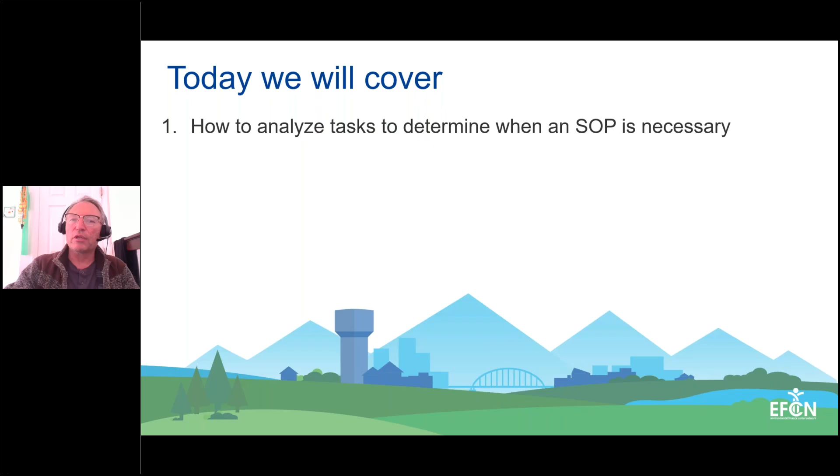We're going to be covering three main points in today's training. First, we're going to briefly talk about how to analyze when an SOP is actually necessary. You don't need an SOP for every task in a water and wastewater system, it's only for those critical tasks that need to be performed the same way each time.

The main bulk of our training today is we're going to be walking through the 9 components of an SOP document, and we're going to be using an actual example from a utility called emergency repair of water main breaks. So we're going to be looking at the conceptual nature of the SOP as a 9-component document, but also looking in the context of an actual example. And lastly, throughout the training, we're going to be talking about tips for creating and testing SOPs.

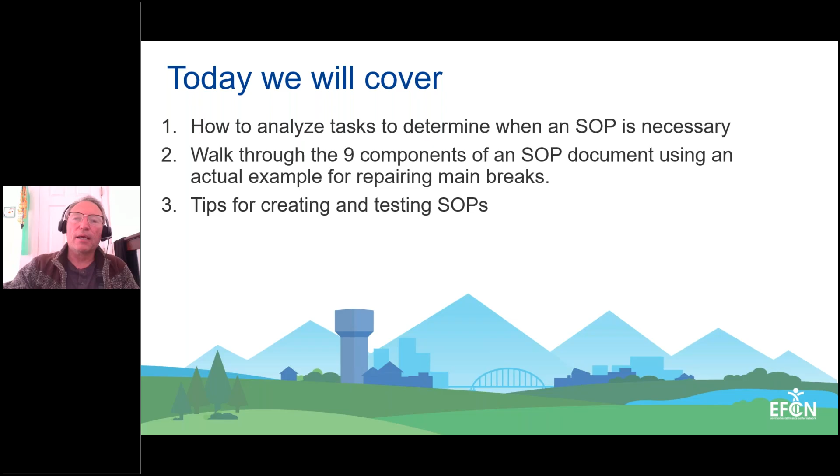You have some resources in the handouts tab. One is 2 sample SOPs, actual SOPs that were developed, and we've redacted the names and identifying information from those SOPs. The second is an editable SOP template that you can use to develop your own SOPs. And lastly, there are some references.

Did we lose the screen, Owen, or are we okay still? Still able to see your slides.

Okay, good. And lastly, there's some reference links that are actually in the PDF of the presentation. I'm going to go off camera for a little bit just to maximize the view of the slides for you on your end as we get going.

So let's jump in here. And first of all, let's just briefly talk about what a standard operating procedure document is.

First of all, it's an official document, and it's going to include step-by-step instructions for completing some type of critical task. And we want to be able to do that task in essentially the same way each time. It may not be in a robotic way where every single action is exactly the same, but it follows a standardized sequence and standardized consideration.

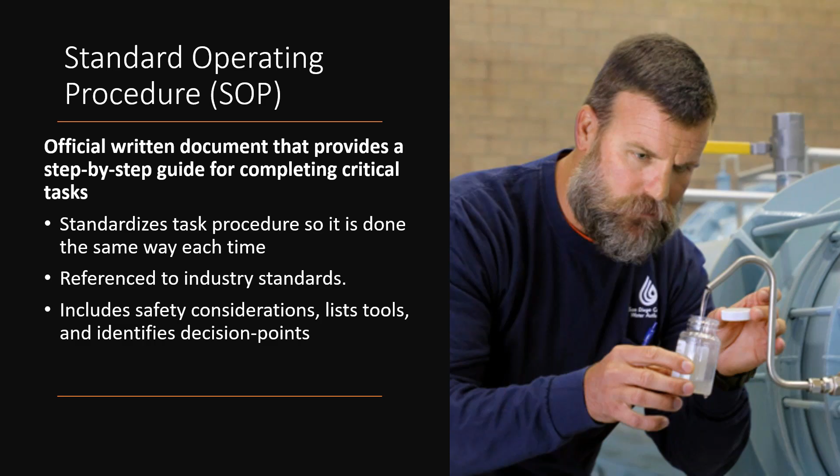And this document provides the answers to the basic 5 question types: the who, what, when, where, how. First of all, the what. In this case, in the example we're looking at today, is emergency water main break repair. And when is when a main break occurs. And where, in this case, it's in the context of a water distribution system.

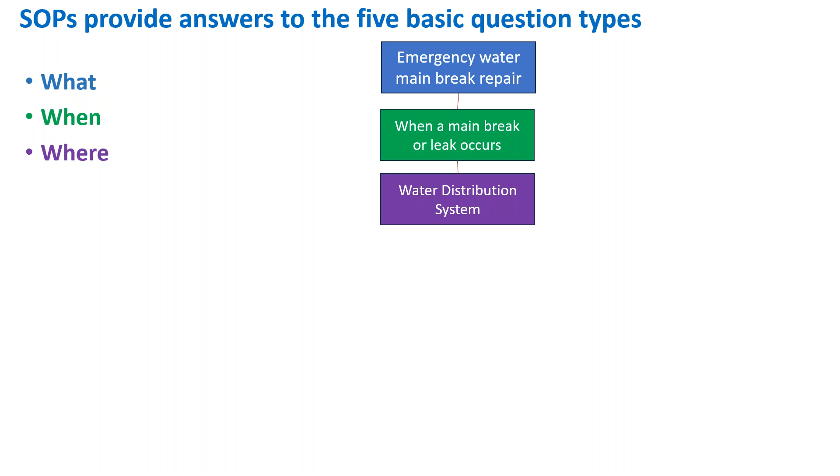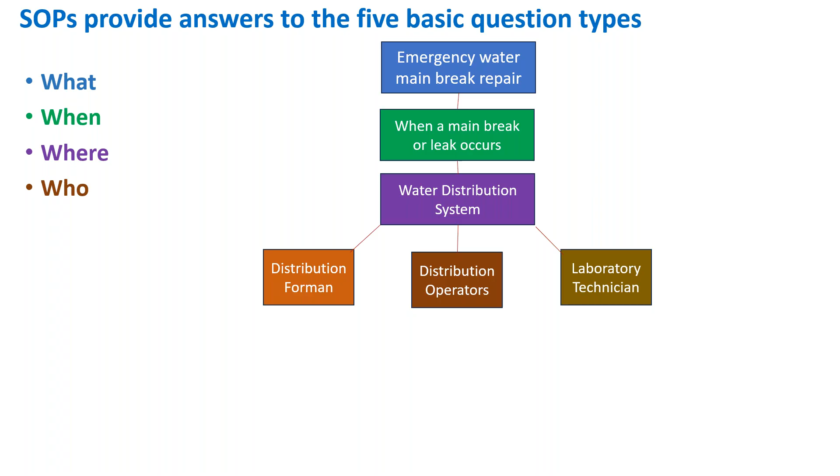Now, the where could be well 1 or east treatment plant, but in this case, the where is anywhere in the distribution system. The who, in the example we're looking at today, includes 3 different employee groups. You have the distribution foreman, the distribution operators, and laboratory technicians that are all involved in this particular task. If you're developing an SOP for a different task, obviously all these questions would be different answers.

And finally, the how tells what and how each of these employee groups is going to function during the SOP task. First of all, the distribution foreman in the example that we're looking at today is going to evaluate the site conditions for safety and the type of water main break, and is responsible for ensuring that there's resources and tools available to complete the task safely and effectively.

The distribution operators are the ones that are going to actually excavate, repair, and disinfect the main, and they're going to collect bacteria samples. And then finally, the laboratory technicians are the ones that are going to run the coliform test and report back to the distribution foreman.

And of course, once the main has been repaired and it's been flushed and disinfected, and the coliform results have been run, and there is a negative, there's no coliform in the system, then they're able to actually put the main back online.

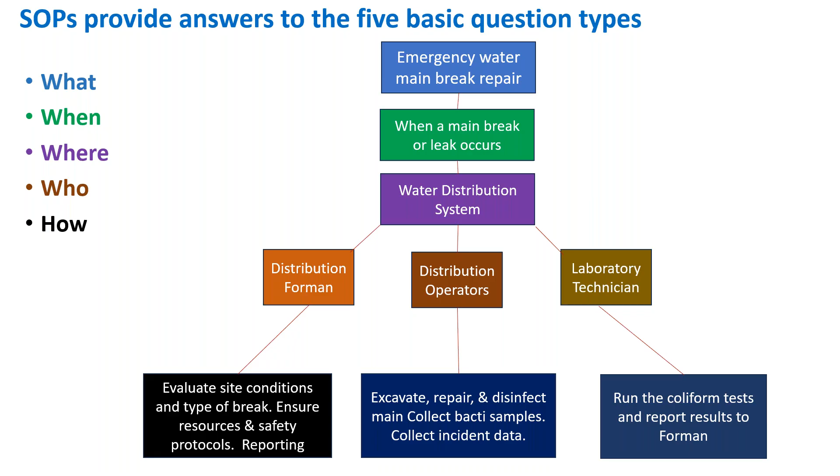There is some consideration about when you actually need an SOP for a task. I mentioned before, you don't want to have an SOP necessarily for every single task. There's some reasons for that. It would become administratively difficult, but it would also be difficult for the operators, because we don't want our operators to be, our operations staff is not robots.

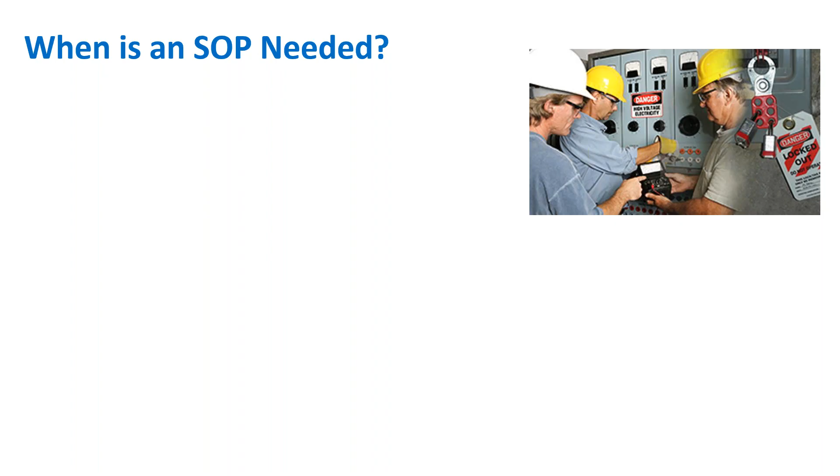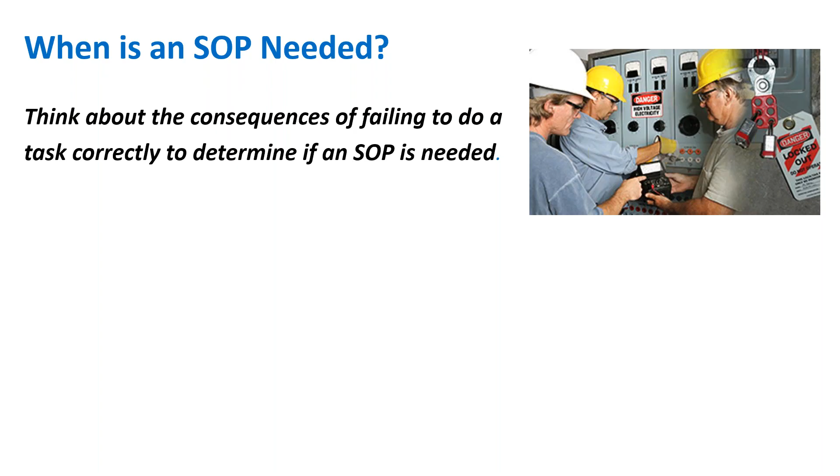They're our eyes and ears, and their knowledge and insights are essential. But in some cases, for very critical tasks, we need it to be done at least in the same type of sequence and considering the same type of factors. So some of the things that you can think about is, what are the consequences of failing to do this particular task correctly? And that would let you know if an SOP is needed.

So you can consider these 5 things. Would doing the task incorrectly result in some kind of public or environmental health problem? Would it result in a regulatory compliance problem, a safety hazard to operators or the public? Would it result in an outage or breakdown? And finally, would it result in some type of difficulty, as in like a high cost or difficult repair or difficulty to recover?

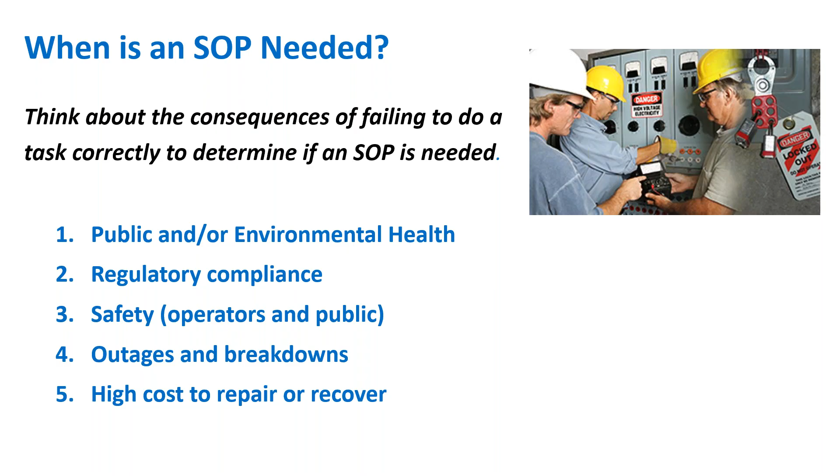At this point, that was kind of our introduction. We're going to go ahead and go to poll 1, and we're going to try our hand at analyzing if an SOP is needed.

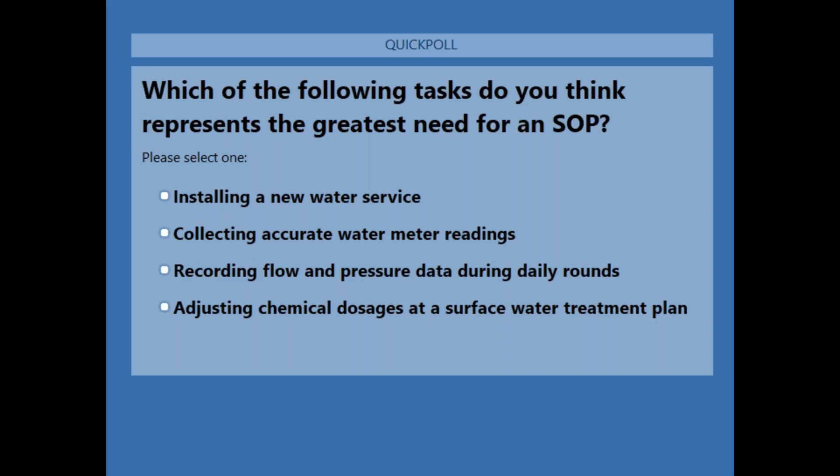All right, so results are in. To the question of which of the following tasks do you think represents the greatest need for an SOP: 29% said installing a new water service, 5% said collecting accurate water meter readings, another 5% said recording flow and pressure data during daily rounds, and 61% said adjusting chemical dosages at a surface water treatment plant.

Great, thank you Owen and thank you everyone for participating. I agree with the large majority of you that made those selections. We were looking for the greatest need among these, and with that 61%, I agree that's probably the greatest need, because adjusting the chemical dose at a surface water plant is critical.

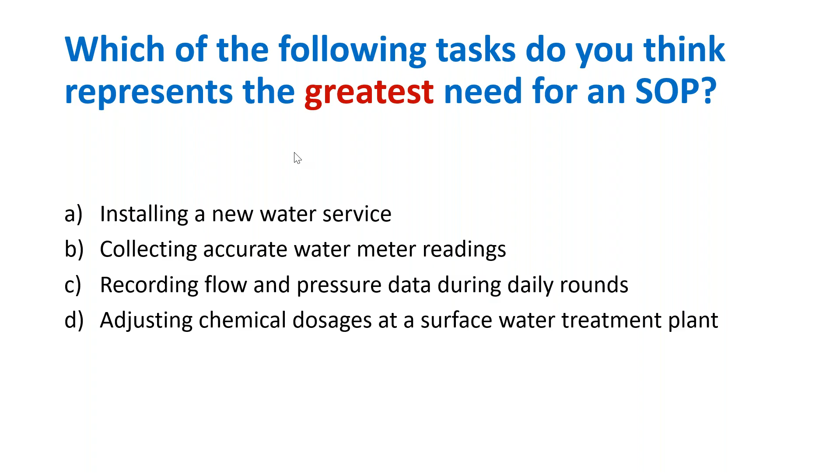The effluent of a surface water plant needs to be within or below a certain turbidity limit. When our coagulant is adjusted correctly, we can meet that 0.3 NTU or less limit, so we can ensure there are no pathogens in the drinking water and meet that compliance target. So there's compliance and public health involved there.

Also, if our dose was too high, it's possible we could have toxic chemicals in the water. And when operators are handling chemicals during the jar test, some of these chemicals are actually corrosive and hazardous, so there's a need for certain types of personal protective equipment. So there are multiple reasons why you would want an SOP, probably for adjusting chemical dosages.

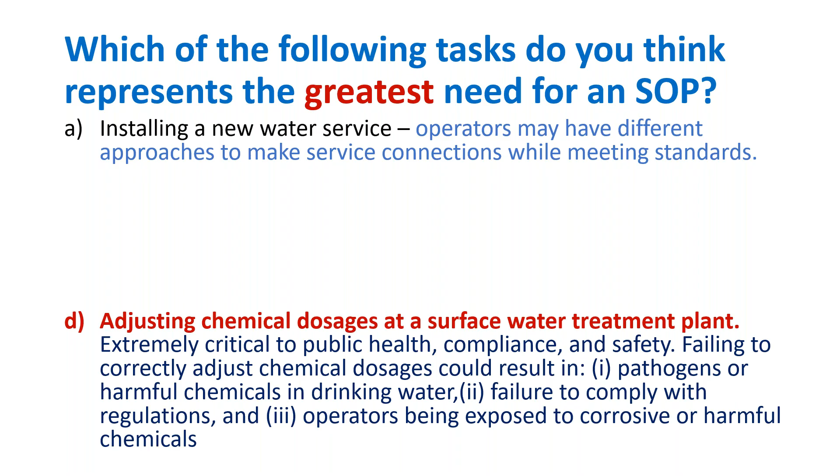Now, installing a new water service is also important. I don't think it represents the greatest need here, but it's something you'd want to potentially do the same way each time, although there may be lots of variables, different types of mains in the ground, from asbestos cement to cast iron to ductile iron. There might be a lot of variety, and probably the main thing is to make that connection to a certain standard. Operators may have some flexibility in the way they approach that.

Collecting accurate water meter readings is probably not critical to health, safety, or compliance, and the method to record flow and pressure data is probably not as important as the pressure itself. But we also recognize that pressure is a critical element in water distribution systems.

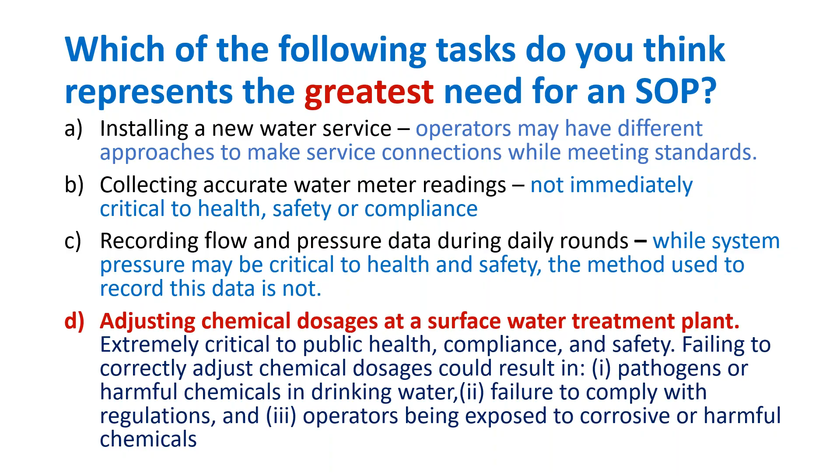I'm going to share with you some common and uncommon problems that have happened in water and wastewater too. The first one is an installer skipping the step to confirm the direction of shaft rotation when connecting a turbine pump. The step gets skipped, the pump is turned on rotating backwards, and severe damage is done to this very expensive pump, damaging the impellers, the casing, the bearings, and the shaft.

That would be an example of something that, if done wrong, would result in a lot of repair, high repair cost, and a lot of hassle. You'd have to pull this beautiful pump again, and there'd probably be an extended outage.

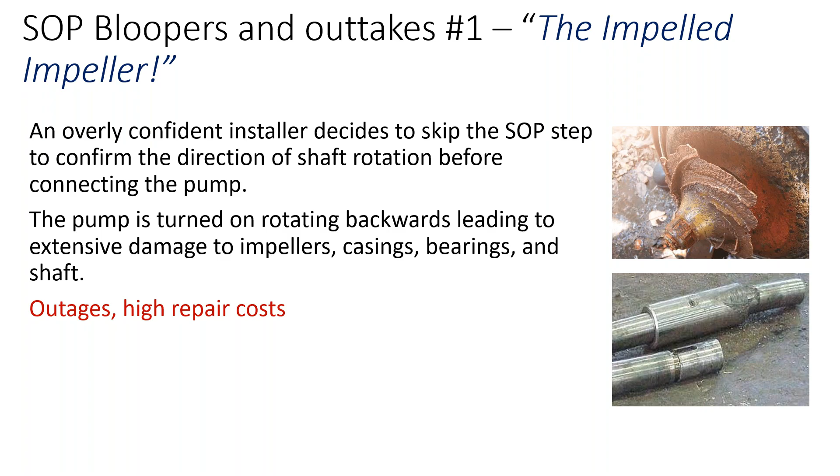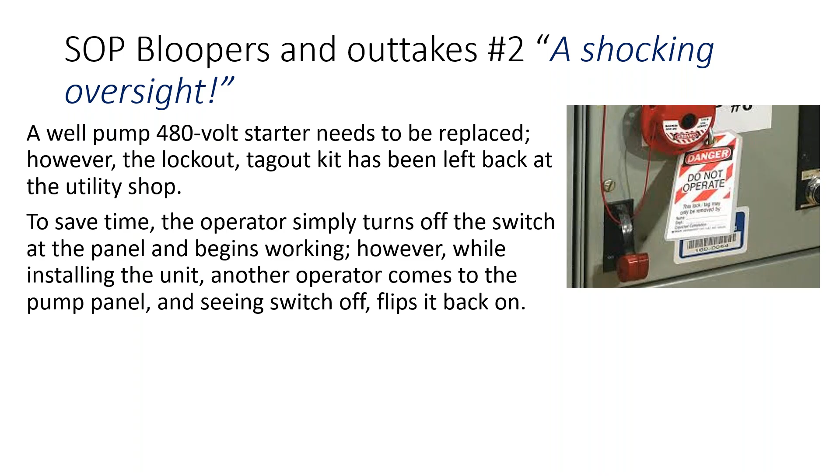The second one involves a safety issue. An operator is going to install a 480 volt pump starter and forgot the lockout tagout kit back at the utility shop, so decides to just turn off the switch at the panel and begin working. While that operator is working, another operator comes along, sees the switch is off, and flips it back on. That could result in someone getting shocked, maybe even killed, so you have a safety incident and a problem with OSHA compliance.

So you might go into three confined spaces, have no problem, but the fourth one might be the one that does some harm to us.

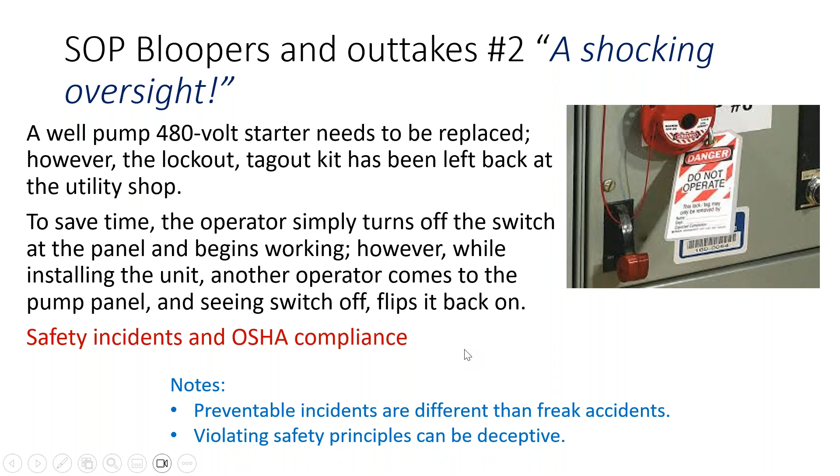The third one here is a compliance issue, and this was an actual event that occurred where an employee overrode a waste treatment alarm, and it resulted in 10,000 gallons of hexavalent chromium being discharged in the Huron River in Michigan. This was obviously a compliance problem, and they did fire the employee, but we don't know enough about the story to say that it was all the employee's fault.

Maybe the employee was told, hey, if this alarm goes off, just override it. We don't know the details, but obviously that would be an indication we should investigate why that alarm is going off.

So that was an example of a task that, if done wrong, could result in environmental and public health problems. That hexavalent chromium is the same chemical that was in the Erin Brockovich story, by the way.

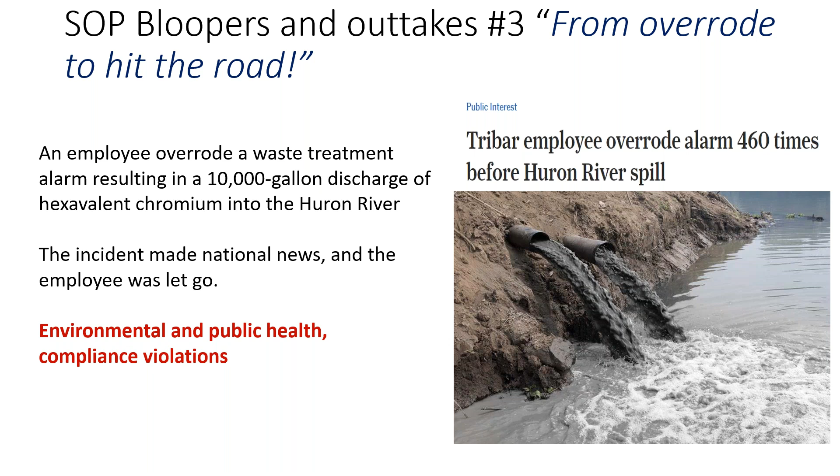There are some problems with SOPs. On one hand, we're saying make sure that you have reason to have a SOP. It's a lot of work to develop an SOP, and there's strict procedures that have to be followed. So that's one of the reasons why you don't want to develop an SOP just for every task. You don't want too many.

Also, number one here, SOPs which are no longer relevant. And why wouldn't they be relevant? Well, they might have been developed, but since then the process or the equipment has been changed, so they haven't been updated.

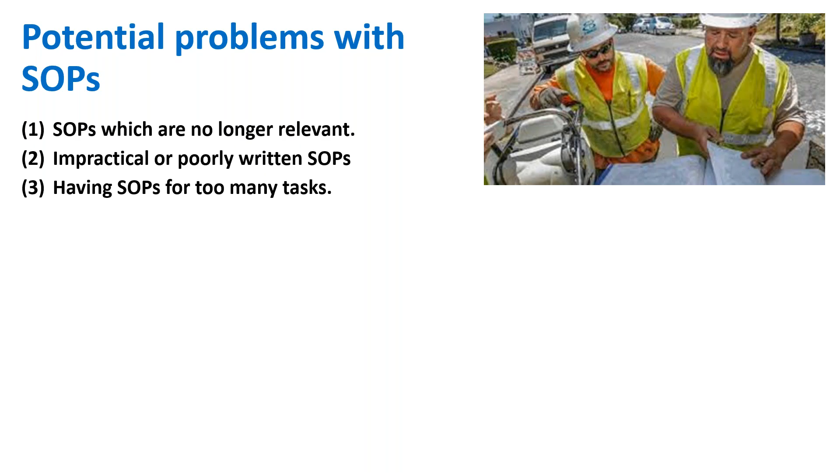Impractical or poorly written SOPs make it more of a hassle to follow, or it could even result in mistakes. And having too many SOPs for too many tasks can really lead to a culture where employees start disregarding even the well-written and critical SOPs.

It also can interfere with operator initiative. Operators are your eyes and ears, the decision makers out in the field, and you want them to be using their knowledge to the best of their ability.

And there's another side to this coin, though, is when we have good SOPs which are not used, and that has to do with more internal factors. One of the first factors is employees may not have the knowledge to perform the task. They just don't know how, and that could be corrected with training.

The second layer is they know how, but they don't have the tools or resources. So insufficient resources necessary for the task. That would indicate we have a budgeting problem at our utility.

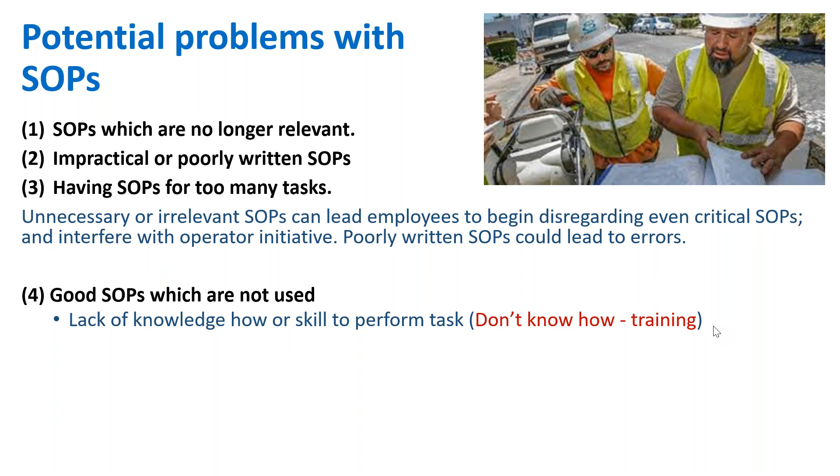And then there might be a lack of clear direction and expectation. In this case, the employees may know how to do the task and have the tools, but they didn't know that they were supposed to perform the task. So that would be kind of a management and communication problem. We have a lack of communication.

And finally, a lack of motivation. The employees have the tools, they have the resources, they know they're supposed to do it, but for some reason they either didn't want to do it or didn't think it was important to do it the way the SOP said. That could indicate we have some kind of cultural problem or perhaps an employee problem.

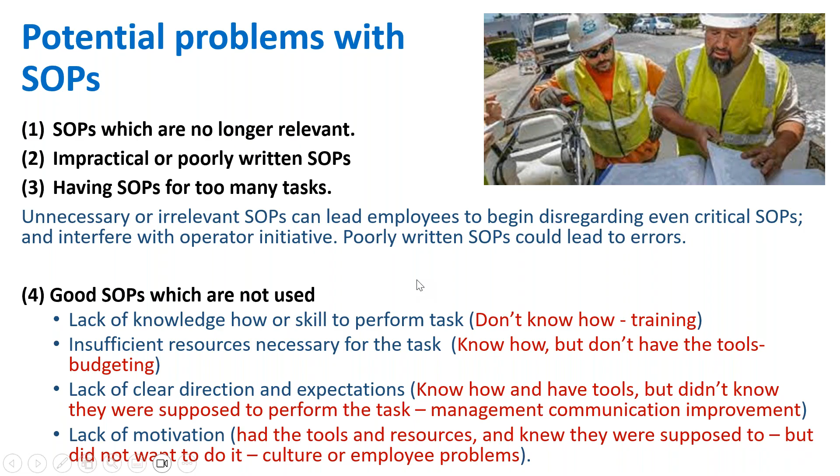And that brings us to the idea, our first point there was SOPs that are no longer relevant. So we want to make sure we maintain our SOPs. And I have a little scenario here for you.

We have a new operator, and this operator goes out to a sodium hypochlorite feed system at a well, and needs to adjust the sodium hypochlorite feed system for disinfection, and thumbs through the SOP binder, but the only SOP on adjusting disinfection is some instructions for the old gas chlorinator that used to be at the site. So my question is, what could have been done to prevent this situation?

Would it have been a procedure to periodically review and update the SOPs? A policy to develop SOPs every time we have some kind of new equipment installation or change? Some kind of practice on onboarding staff about critical O&M procedures? Or would it be all of the above?

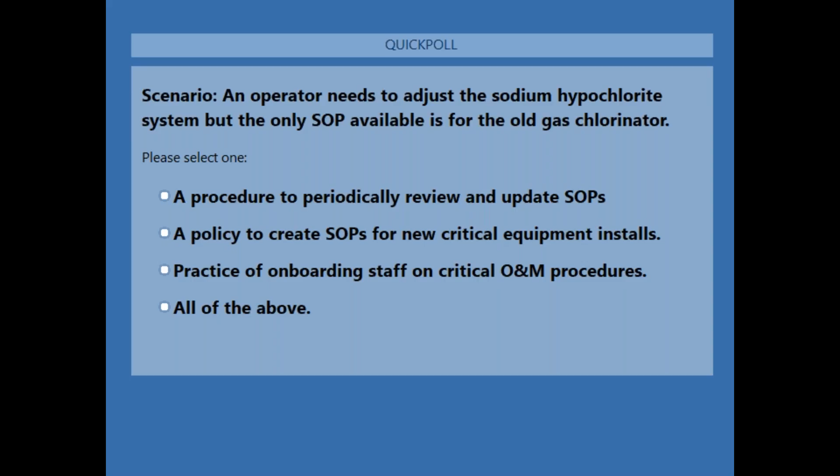Okay, so poll results are in. It's pretty lopsided. About 6% said procedure to periodically review and update SOPs, 2% said a policy to create SOPs for new critical equipment installs, and 92% said all of the above.

Well, I have news for everyone. Everyone got it right, because all of the above means if you picked one of the above, you're correct. So obviously all of the above, right?

What would a procedure to periodically review and update SOPs look like? Well, that could look like some type of annual review where you gather with the operators, maybe a consultant, and you review all the SOPs and ask, do we need to update? Do we need to revise?

The second, a policy to develop SOPs for any new equipment installations or changes. So every time there's a new project in the capital improvement plan or some kind of a change, we have a checklist that says, hey, check out the SOP. That's a good idea too, isn't it?

And then finally, some kind of practice when you onboard staff where they are trained on the SOPs. So those are all suggestions that you could potentially bring into your own utilities. We want to make sure we have some procedures in place to review and update SOPs anytime there's any of these type of changes. And also it kind of helps us connect this idea of how SOPs are components tied in to employee training and onboarding.

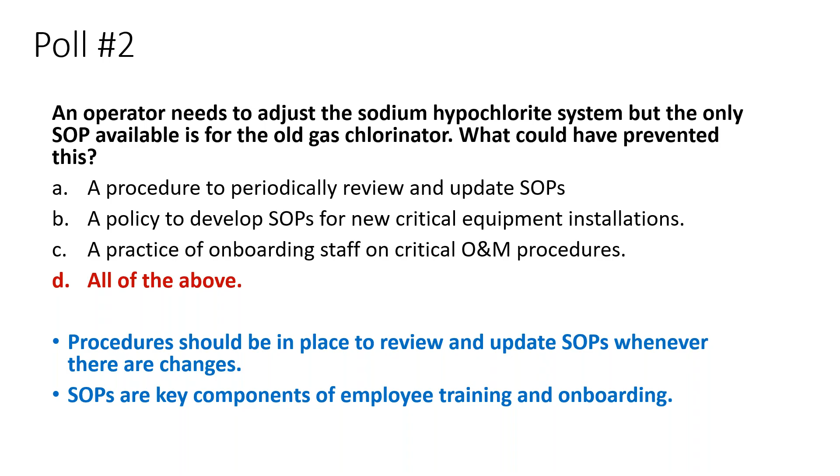Thanks for all your participation. You guys are great. Is everybody following along okay? Are you enjoying the training so far? Right now, we're going to launch into...

Kind of the meat of the training today. We're going to talk about a suggested format for developing an SOP. There's a total of 9 components, and I'm going to go through all 9 components here as completely and quickly as I can. I'm going to try to strike a balance between the two so it doesn't become monotonous.

I want to let you know that the sample SOP that you have as one of your handouts is the full SOP, and we're going through that SOP on emergency repair of water main breaks. That's the example we're using. But the components, the 9 components, it's a template that you can use with any task that you need an SOP for.

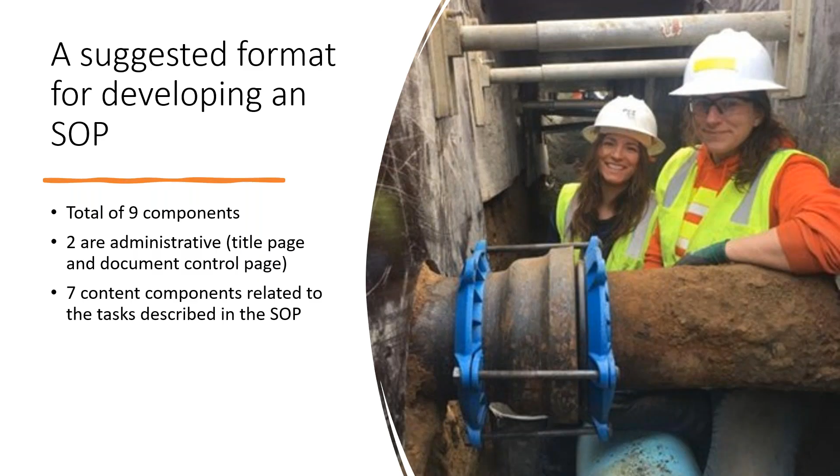Now, among these 9 components, the first 2 are kind of administrative. You have the title page, and then you have a document control page. And then the remaining 7 components are really the contents of the SOP. They're directly related to the tasks that are in the instructions of the SOP.

So, like I said, we're going to be looking at emergency repair of water mains as our example, but we're providing a format for any SOP. And this is the 9 - if I look at all the 9 components at once, this is what they would look like.

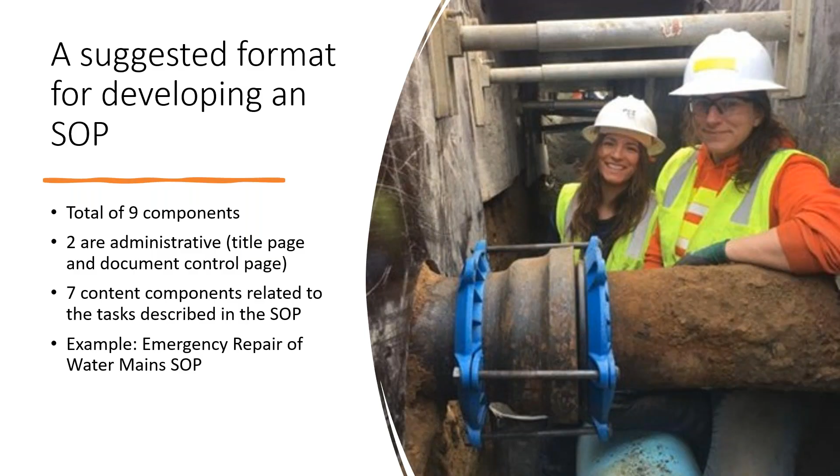Then finally, there's going to be some data that needs to be collected associated with the task that you're assigning. And then finally, the references that your SOP is based on.

And just again, to mention, you have some resources. We have a template with instructions, and you have a unique utility with unique needs. So you can take that, feel free to edit it in a way that meets the needs of your utility. And if you need help with developing SOPs, you can contact me or anyone throughout the EFCN to help you develop an SOP.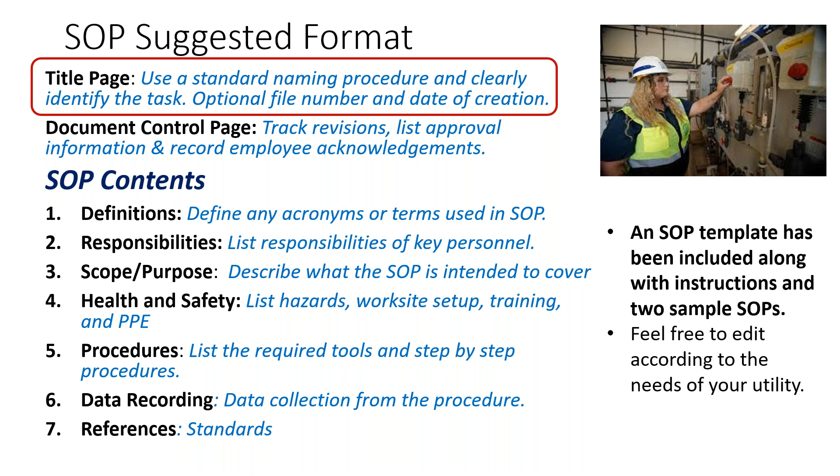We're going to start by looking at the title page. And the main idea of the title page here is to select a title that clearly identifies the task. In the example we're going to show you, they have some other details, some other summary details on the title page, including the file number, the revision number, and the date.

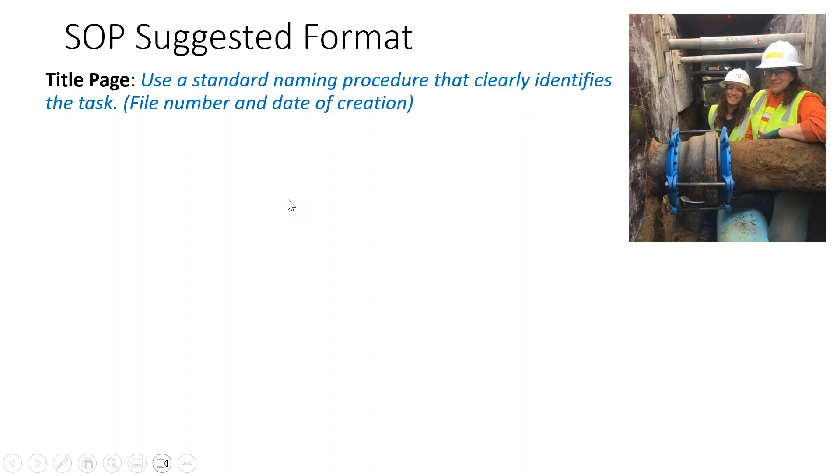After the title page, we have the document control page, and we have a template for that. That's a place where you can track any revisions. When you create an SOP or make a revision, you'll probably have somebody that approves that—it might be the distribution supervisor or utility manager. You can also record when employees have received training on the SOP. Here's an example of what that might look like.

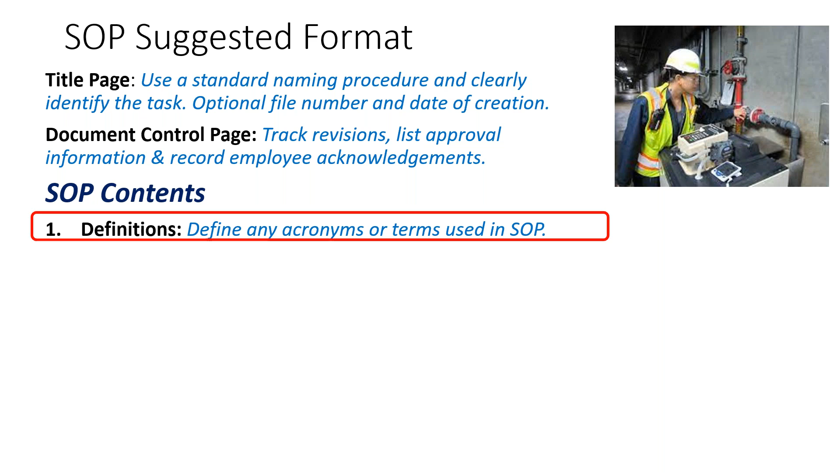The third component here is the first part of our actual contents: the definitions. Here we're going to define any acronyms or terms that we're going to use throughout the SOP. So let's take a look at that. In this case, this is their full list for this particular example—they just have 5 acronyms here.

AWWA and OSHA I'm familiar with. The one that looks a little unfamiliar is this term EAM, and they've defined it for us: Enterprise Asset Management System. They have some kind of database where they store all of their asset data. So you want to spell out any acronyms, and it's a good idea to define any unfamiliar terms as well.

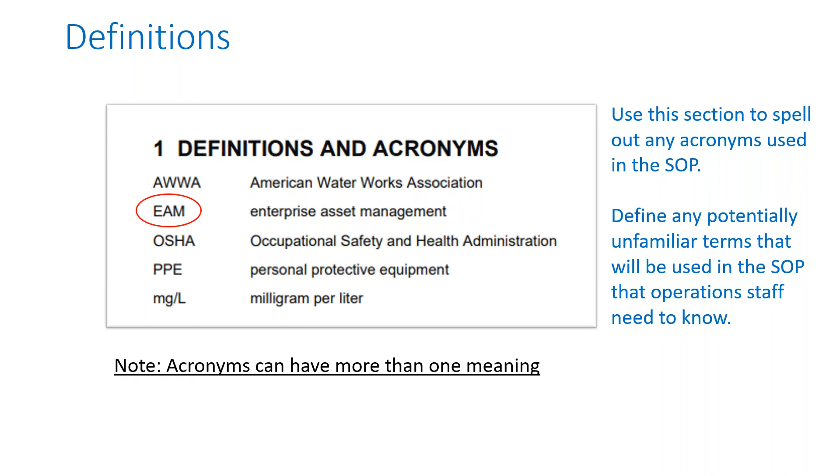And the reason it's important to spell out acronyms is they can have more than one meaning. I picked a couple of very common water acronyms, for example ERP. When I hear ERP, that tells me emergency response plan, but if you look it up on Google, they won't give you emergency response plan, they'll give you enterprise resource planning.

The same thing with CCR. To my water operator brain, that says consumer confidence report, but that can also mean a real estate term, covenants, conditions, and restrictions. And it can also mean a business term, cash conversion rate. So it's a very good idea to spell those out, exactly what you mean in that SOP.

Now, the second part of the contents, responsibilities, is about assigning the responsibilities of all your key personnel. We'll take a look at what that looks like here.

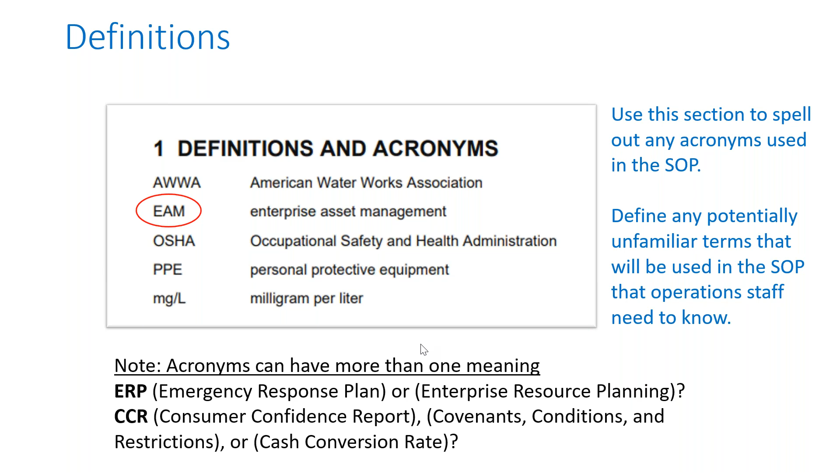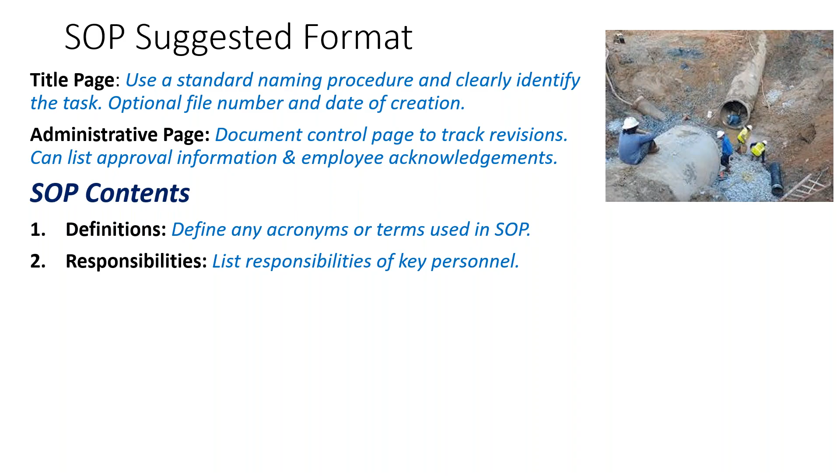A couple of important things: each employee group is assigned responsibilities, and you don't have crossover. You wouldn't want to assign the same task to more than one employee group, and you wouldn't want to leave any task unassigned. This process of going through this actually helps you make sure that doesn't happen.

You notice in this case we have the foreman, and just like that chart we had at the beginning of the presentation, they're overseeing the repair and documenting it in the EAM system. Now we know what EAM stands for, right? Because we had the definitions - it stands for Enterprise Asset Management System.

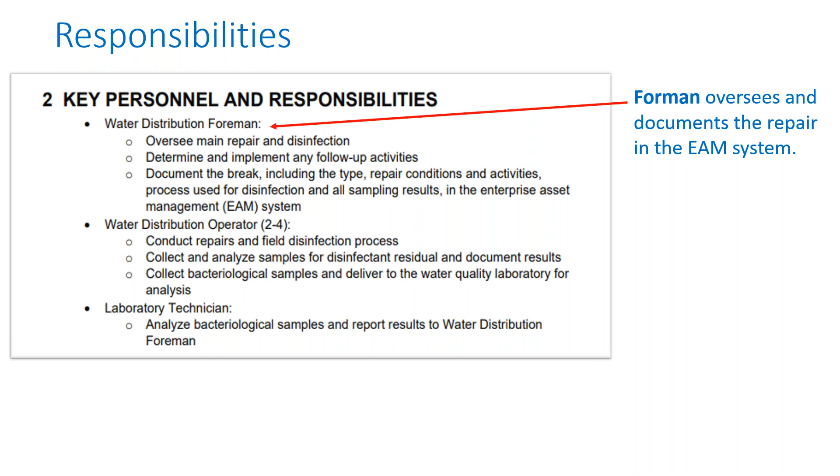The operators are the ones that actually make the repairs and collect the samples, and the laboratory techs analyze the BAC-T samples and report to the foreman.

It's a good idea to use bulleted lists like this, and very succinct, clear operational language. It makes it very efficient, and you can see it can be done very simply - just a bulleted list of tasks that each employee group is responsible for. So succinct language, operational terms.

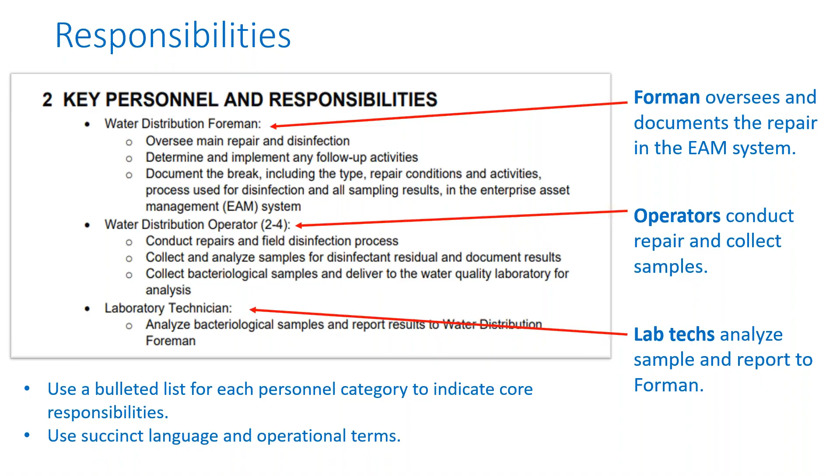And the next component is the scope or purpose of the SOP. Now, notice that this falls on like the 5th page of the SOP, but this may actually be where you would start in developing an SOP, because it talks about what the SOP is intended to do - what are we trying to accomplish with this task?

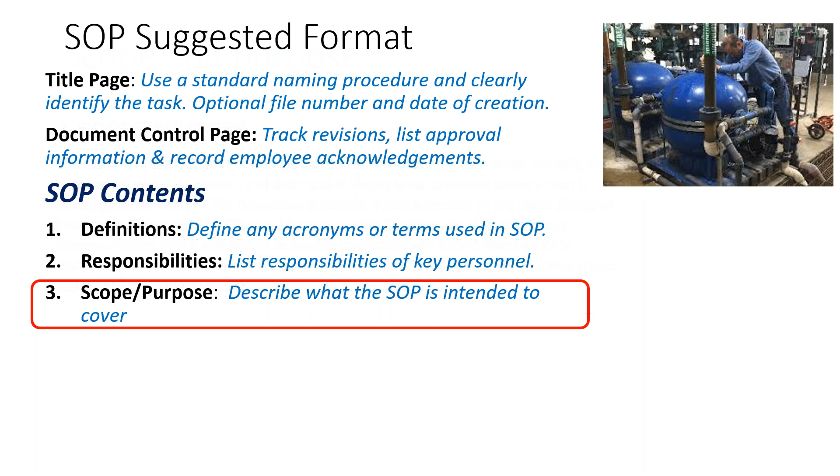Here's an example. Now, most of these sections I'm showing you, I can't fit the whole thing on this little slide in a PowerPoint slideshow - that's why you have the example SOP as a handout. This one, however, I am showing you the whole thing. This is the entire section on scope and purpose - just one simple paragraph.

In this case, what they're saying is that this SOP outlines main break repair procedures, and they're talking about how it's done according to a certain standard - in this case, an AWWA standard, standard C651. It's also implied that they're doing this because it's important for microbial control and protection of public health.

So some tips for creating this section. This section is important because you can really start with this and write the rest of your SOP, because you know the focus of what you're trying to accomplish.

So the first consideration: explain what the SOP accomplishes in just one short paragraph. You can state what the task is and why it's important, what you're trying to accomplish.

Some components of why it might be important: you might be doing it because there's a safety consideration, a public health consideration, to make sure you comply with regulations, or like in this case, how you're going to adhere to a certain standard.

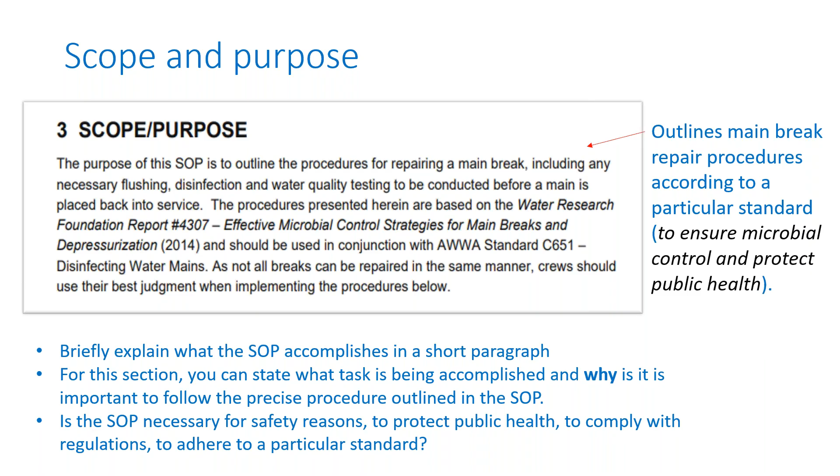In this section, you want to list all of the possible hazards, any factors such as worksite setup, any training that's required, and personal protective equipment that might be needed for the task.

Let's take a look here - this is one where I couldn't fit everything for health and safety in one slide, so I've abbreviated it for you. First, the first section of this health and safety component would be to identify the types of hazards that would be expected with this task. In this case, we're talking about emergency main break repair.

Well, emergency main breaks could happen at 3 in the morning. They could happen on a very busy highway, but they could also happen on a relatively unused little section of road too, so we have some variability here. There could be traffic hazards, heavy construction hazards, trenching and even confined space hazards, and there could even be situations with hazardous chemicals as we're disinfecting the main.

There's lots of other types of hazards that could be present depending on the tasks that you're doing - could be stored energy hazards such as electricity or high pressure, confined space hazards and so forth, temperature hazards. But you would list all the hazards for the type of tasks that you're designing the SOP for. Then you would talk about worksite design.

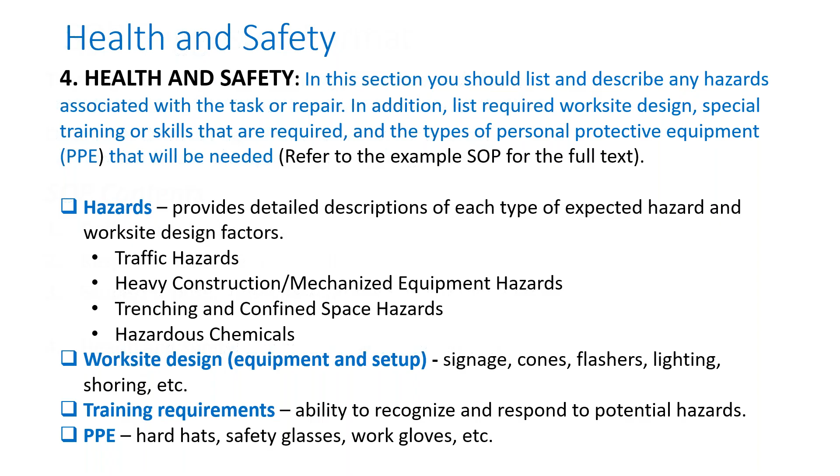And then we get to the procedures. This is the component we usually think of as the SOP. Here we're going to talk about the chronological step-by-step procedures, but we're also going to list all the required tools and resources needed in this section. This is abbreviated - the entire length of the example SOP for this topic is about 10 pages. It's not like we're writing a book, but some of these sections are a little too long to fit on one slide. I'll give you an example of how some sections start and how they're chronologically oriented.

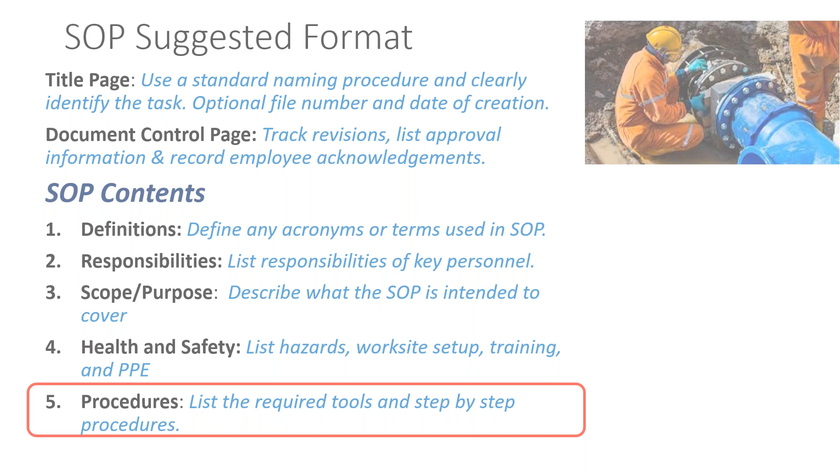What we're doing here is providing a very detailed list of any equipment, tools, and parts - even system maps, things you might not think about as tools, but system maps, metal detectors, valve wrenches, and so forth. And we're doing this according to a certain standard.

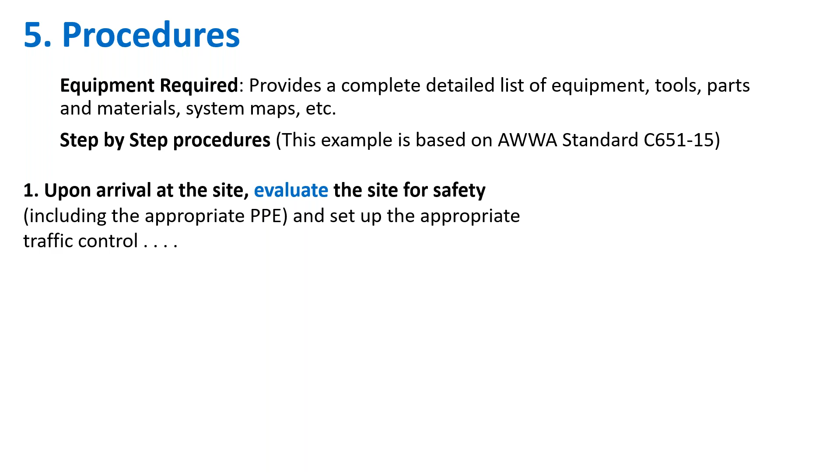Number one, the first step: you arrive at the site and evaluate the site for safety. Next, you evaluate whether you need to isolate the pipe section by closing some valves. Third, excavating the break - we're going to actually dig down to the main to get to the break, and we'll have to install sloping and shoring or some kind of safety measures. And finally, repairing the break, and then it goes on.

So you see how these are chronological, but also notice those words I highlighted in blue font - those are action verbs. You want to list and describe each procedure as completely but briefly as possible in a step-by-step sequential fashion, using very clear active language. Notice: evaluate, set up, excavate, repair - those are operational terms, very direct. It's very easy for someone in the heat of the moment repairing a main break, say at night with busy traffic all around, to clearly understand what needs to be done first, second, third, and fourth.

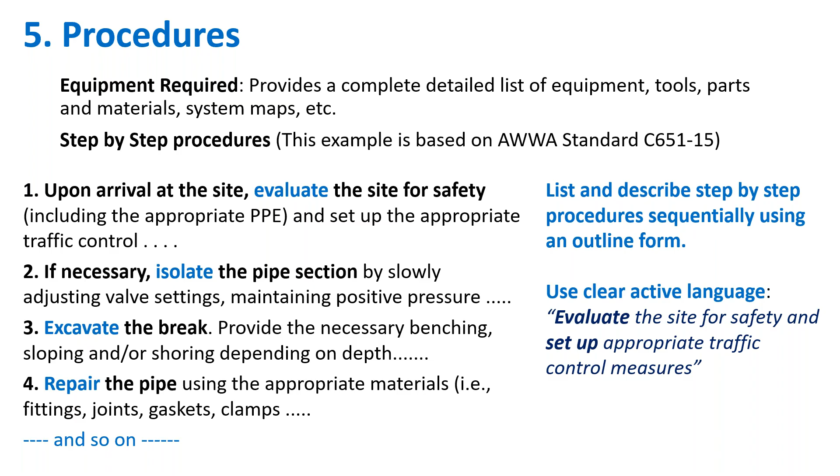Well, it means there are different types of main breaks and different types of pressure conditions. For example, if you go up to a main and it has a small hairline crack spraying out water but hasn't lost pressure, that's a very different situation than a main that's completely busted with all the pressure lost. It's very different as far as the disinfection procedures and flushing procedures you're going to use, and whether you're going to isolate or not.

For example, a thin hairline crack that still has pressure could probably be repaired in a very different way. You might not have to take the whole section of main out - maybe you can use a full circle clamp and get that taken care of, and plan a replacement later. You wouldn't necessarily have to disinfect that type of repair the same way you would for a main break that's lost all pressure.

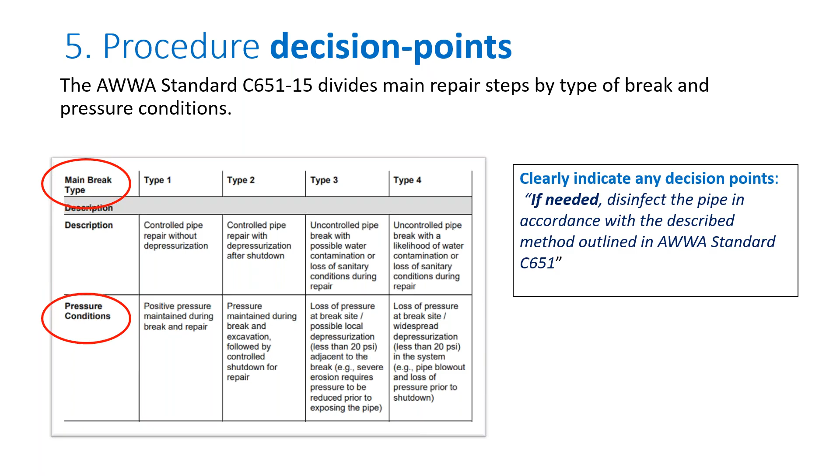Now the next section here is data recording. This is an assignment within the SOP that certain data needs to be collected as part of the procedure. Let's look at an example from the sample SOP. You notice the first sentence here: following a main break, enter all necessary information into the EAM system. And once again, we know that's the Enterprise Asset Management System because we've defined the acronym. And they've listed, in this case,

some types of data that need to be collected: what's the date and time, what seems to be the cause, what type of break was it, what type of pipe was it, and so on. It's good to collect data, especially with underground assets, because how often do you go down and look at your water mains that are underground? The only time you really get a chance to look at them is when you install a service or make a repair. So that's essential data that you can use for asset management, condition assessment, and future planning to plan maintenance, repair, and replacement schedules.

And you could even use the data to evaluate the SOP. You might record how long did this whole procedure take, and were there any problems with the SOP?

And finally, the last part of the SOP is simply the references, the standards that we're basing the SOP on. In this case, they're using two AWWA standards: C651-14 for disinfecting water mains, and C652-11 for disinfecting water storage facilities.

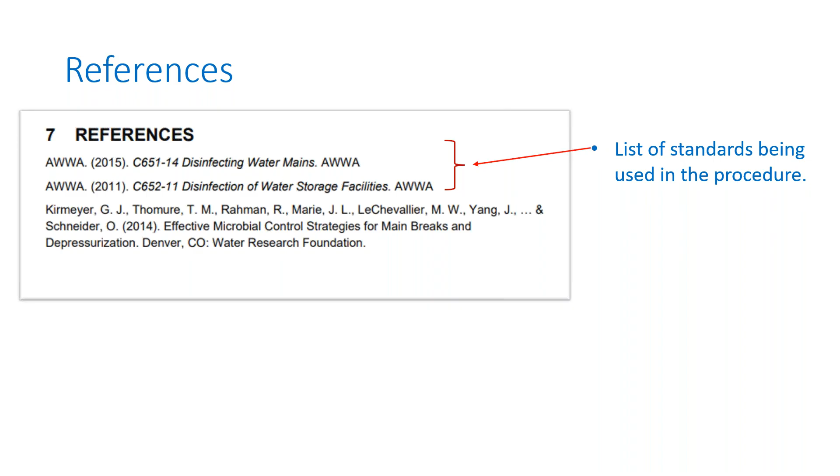So the standards that you use for your particular SOP might be different depending on what you're trying to accomplish. They also have some reference materials, including a scientific study that was done to look at what are effective microbial control strategies for repairing main breaks. You can list that in your reference section.

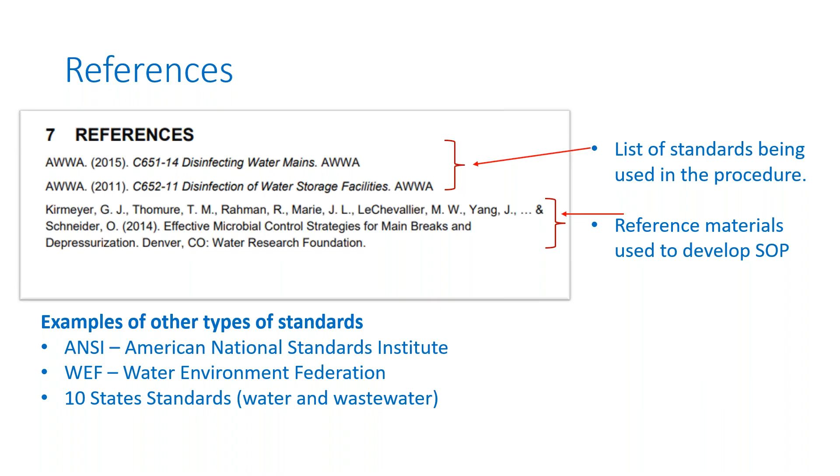There are other types of standards that you might use, and this is by no means a complete listing of all types, but there may be ANSI standards, American National Standards Institute, Water Environment Federation standards. You may be using the 10 state standards for either water or wastewater. There's OSHA standards, and there's even EPA standard methods for laboratory examination of water and wastewater. That's just a short list, and I've included some of those in the reference slide near the end of this presentation for you to take a look at.

Now that completes our walkthrough of the 7 components of an SOP, and let's take a little look at a scenario here.

We have an SOP that we're going to develop for a jar testing procedure. We had an example like this earlier where we picked out a name for a jar testing procedure. Now we have this procedure where we're going to determine the optimal coagulant dosage.

We have this optimized turbidity goal of the effluent that is 0.1 NTU. The compliance goal is 0.3, but we have this optimized goal of 0.1. So what are some factors that we need to think about that's going to be included in the task?

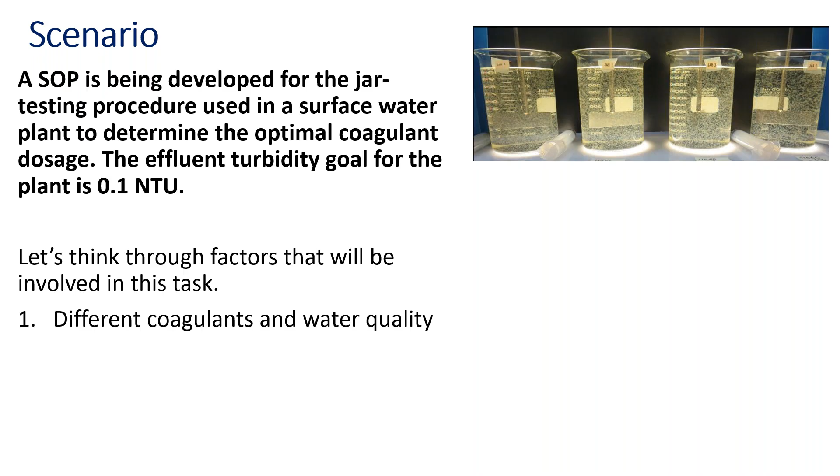There's going to be some decision points we know right off the bat, because we may be using different types of coagulants. Water quality can vary quite a bit in the raw water turbidity, pH, the temperature, and so forth. We'd want to have some instruction about mixing speeds - a mixing speed that would simulate flash mixing for the coagulation component, and then a slower mixing speed to simulate flocculation. And then we'd have a settling time, probably maybe 30 minutes.

And we'd have to have some kind of way to evaluate how close did we get to the optimal result. We'd have to measure the turbidity before and after, and look at the quality of the floc, how well did it settle, and so forth.

And what types of things would we think about for the SOP? We'd have some different elements we'd think about. One would be, what kind of standards will we reference? What level of skill is required? Is there any safety hazards associated with this? And what kind of tools and PPE are needed for the task?

And finally, what should the title for this SOP be? We'll bring up a poll, and you can tell us what title you think is best for this task.

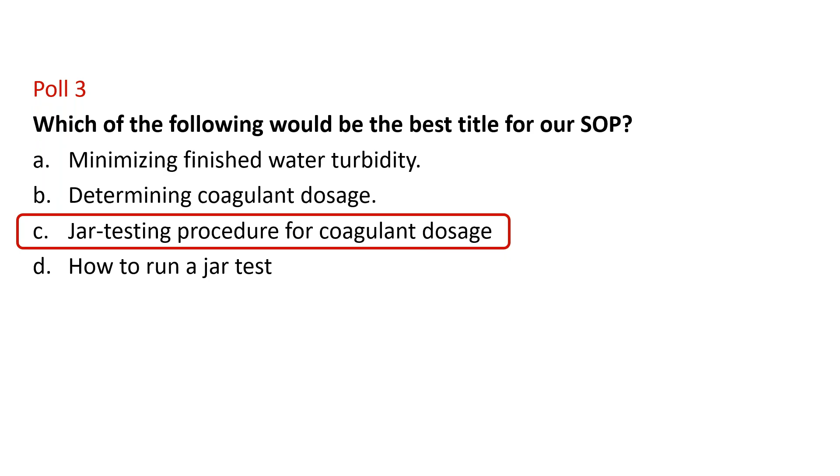Now we had talked about some other considerations for this SOP, and one is whether there's a standard to reference to develop this. There's a manual, M37, that AWWA puts out that's all about controlling coagulation and filtration processes, and you could look in that manual to get information about jar testing.

Also, if you go to OSHA.gov, you'll find information on chemical hazard and toxic substances standards, safety standards, and those are two examples of sources you might include in your reference section of your SOP.

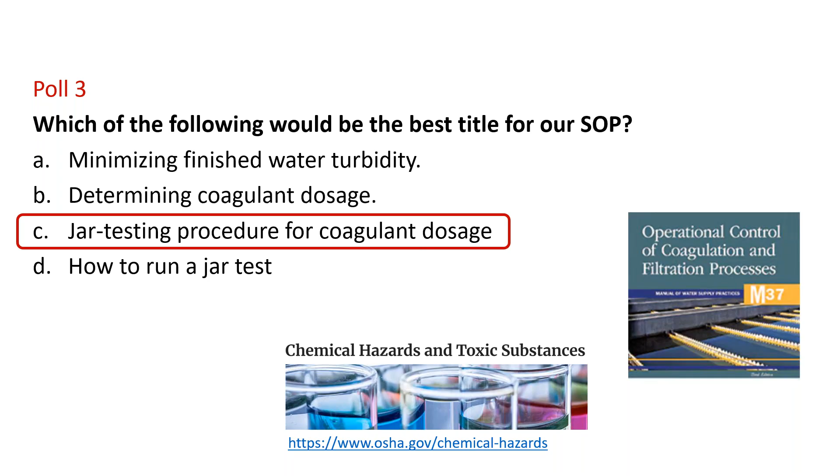You can also test an SOP, and one of the best ways to test it is to have different people perform the task based just on the instructions. You would hand them the instructions of the SOP, the step-by-step part in section 5 of the contents, and see if they can complete the task successfully.

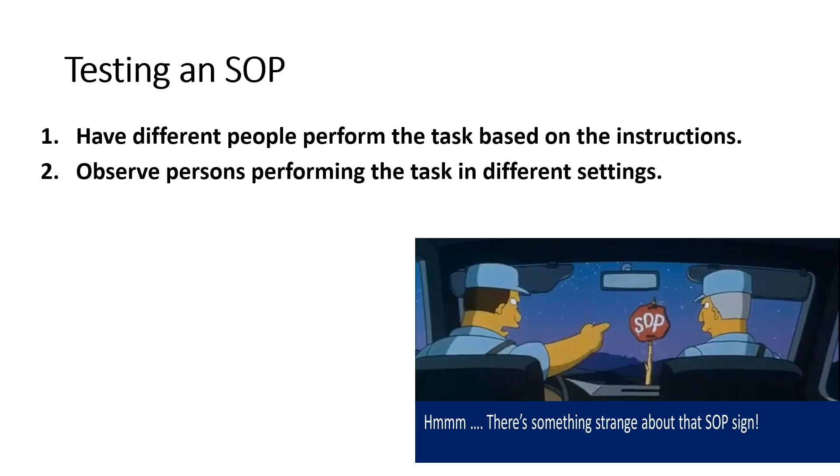Another thing you could do is have people perform the task in different settings. Taking repairing a main break, for example, would be different in the middle of a very busy city street than a quiet alley. It would be different with a massive main break compared to a small leak. There's lots of variables: the depth of the main, the type of material of the main. So you're looking for any misunderstanding areas that need revision in the SOP. And if we look at different performance in different settings, it might tell us if we need to add decision points for different types of variables.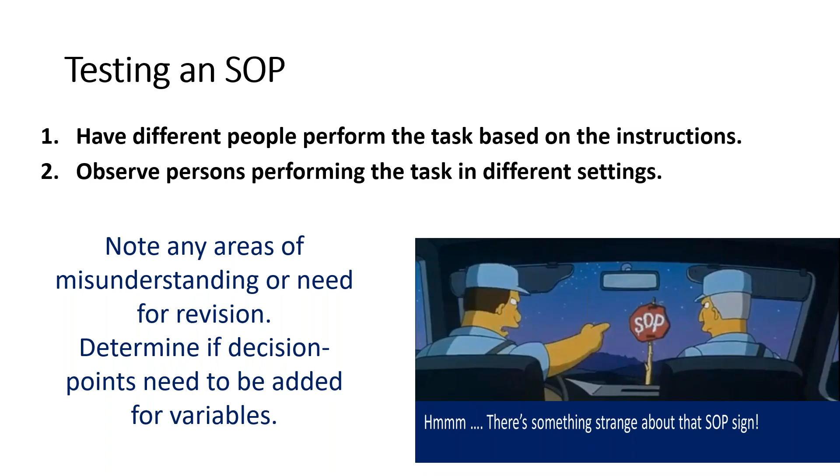There's a kind of fun thing you could do among your staff if you want to help them get awareness of the level of precision needed to create SOPs. Say you had 5 or 6 staff members, and they each create some kind of simple Lego block house or shape. Then they write down the instructions of the steps it took them to make that shape.

When they all get done creating their shape and the instructions, their little SOP, they trade it with each other. Their partner, using just the instructions they've given them, should be able to create the exact same house or shape if they had very accurate instructions. So that's an exercise that you could try.

We're starting to wind down to the end now, and I have a scenario for you. We're going to apply it to our own utility, and we're going to pretend we're part of this utility.

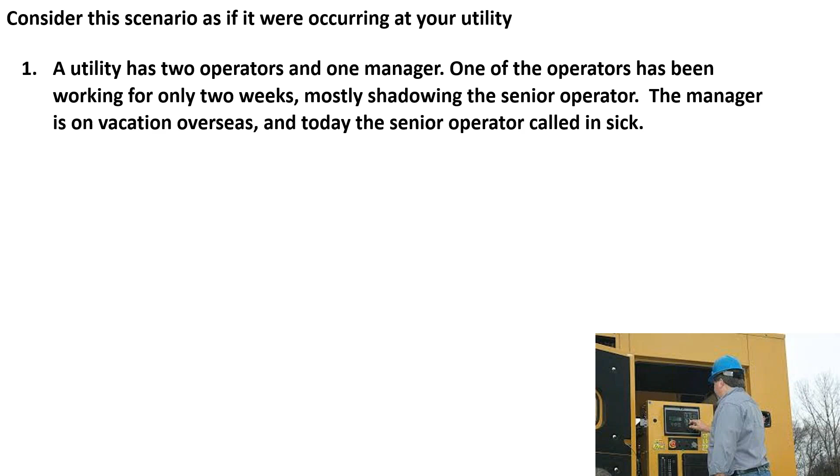We have a utility that has 2 operators and 1 manager, but one of these operators has only been working for 2 weeks and has been shadowing the senior operator. The manager took a vacation overseas, is out of the office, and today the senior operator fell ill and called in sick. So the only person working is the new operator, and we have a power surge that knocks out power to half the town.

In this half of town, there's the main well and disinfection system. There's also a backup generator at this location, but since this is the main well, they depend mostly on the water from this one well. At the current rate of usage on this hot summer day, they predict the storage tank will be empty within 2 hours. Then they'll have problems providing water to people, potentially low pressures which can lead to public health problems, and there's also going to be problems with fire flow—they won't have sufficient water for fire flow.

So if this was your system and you needed to get this generator started, and the well and disinfection system back up to speed, where would this new operator need to go to find the information to get this generator working and transferred, and the well and disinfection system back online? Where would they go?

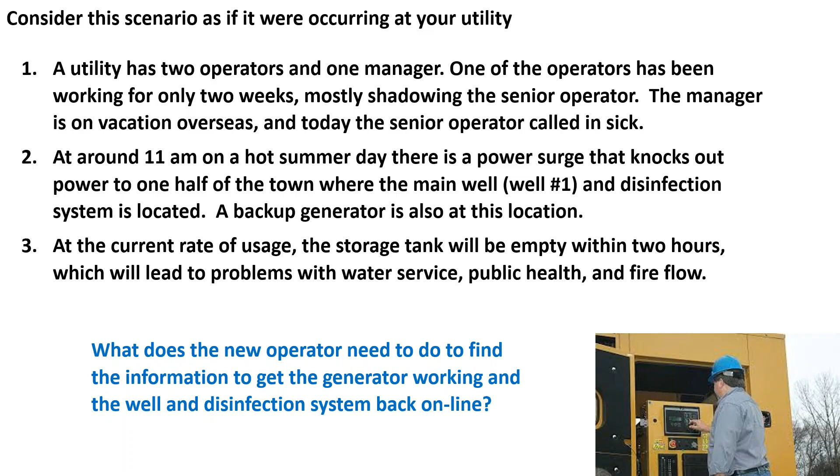And so we have some options here, and we're going to bring it up on poll 4. Would they need to thumb through the O&M manual, the instructions are at the well, the operator already has a binder that contains SOPs and has been practicing them, or would the operator have to try to contact the vacationing manager or sick operator? So this is something for you to think about. What would happen at your utility? Is there a place to find this information? And if it's something else, you can put it in the chat.

Okay, so the poll's been up and running. We'll give it another half minute. I like the way you keep us honest, Owen. Thank you, thank you. Okay, another 10 seconds. Okay, I think we're good to go.

So results wise, 7% said thumb through the O&M manual and search through files. 13% said instructions have been placed on the wall at the well. My apologies, 67% said operator has a binder containing SOPs and has practiced them. And then 14% say the operator must contact the absent manager or operator.

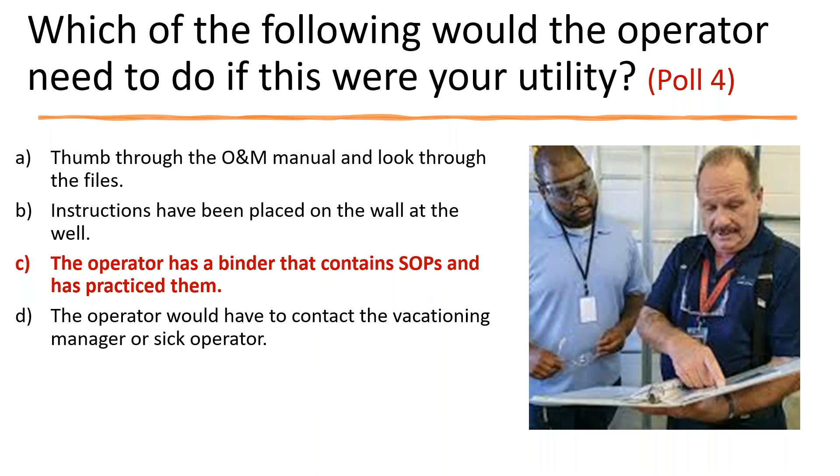I want to end with some tips for successful implementation of SOPs. It's a good idea to involve your staff in developing SOPs and to test them. You want to make them easily accessible, and provide training, especially during onboarding.

And you want to budget time for employees to enter the data that's required to be collected in the SOP, and ensure employees have the necessary training and equipment to carry out the tasks in the SOPs. And you want to create a process to review and update your SOPs at least annually, and whenever there's any kind of equipment or process changes.

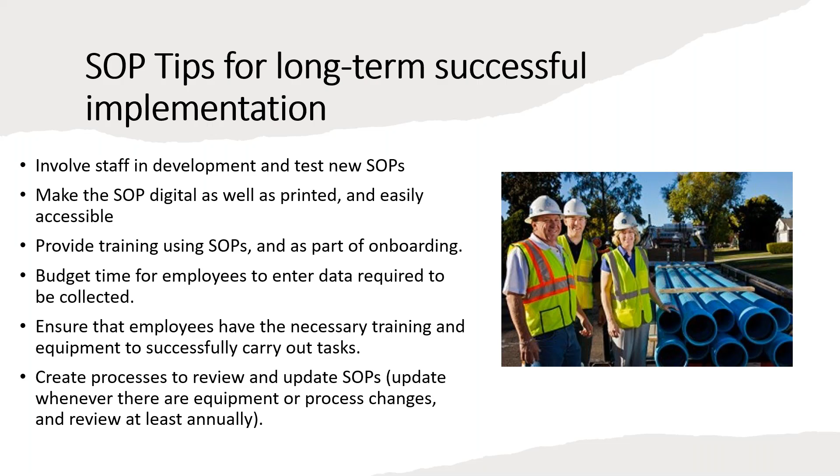And as we're nearing the end here, I want to let you know that you can go to efcnetwork.org, and there's a variety of resources there, from funding guides. You can request technical assistance at no cost, register for more training events like this, and there's dozens of tools and resources, videos, blog articles. If you'd like to visit the Great Lakes Environmental Infrastructure Center, where I'm coming from, it's gleic.org. You're welcome to contact me directly at gpearson@mtu.edu.